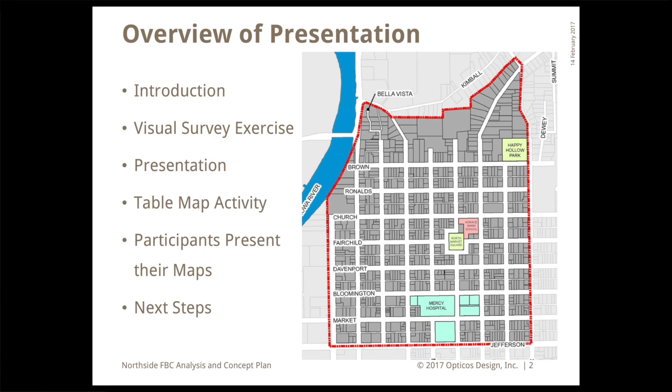So as John said, this is the first of 3 trips. It's really about us starting to understand your community. We had a little bit of knowledge both from Dan's previous trip and from working with staff on a basic framework of a scope. We will be coming back twice more, where we are going to be exploring these topics with you all. So we'll take the input we get today, what we hear from you all, what we'll hear tomorrow night from the South District, what we heard from stakeholders, and we'll bring it back and tell you what we heard.

We'll also tell you what we've started to analyze. So what did we get from looking at these maps? What do we get from looking at the information the city has in their database? So we'll come back and talk to you about that and ask for feedback again. At that trip, we'll start to present some tools that we can use. We'll take that feedback, come back one more time, present again things that we heard, and ask for feedback. The culmination of all of this effort is really a report on recommendations for next steps. So that's where we'll be heading as we move forward in this project.

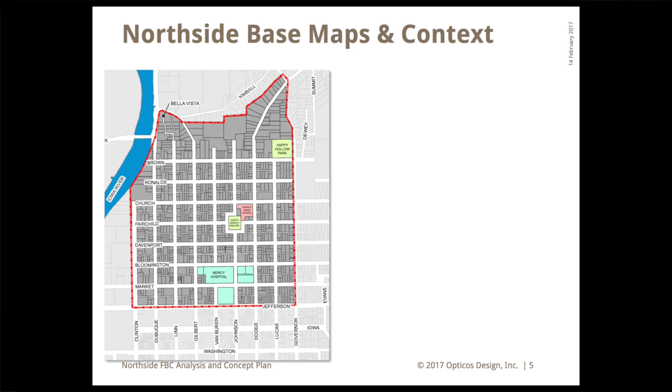For tonight, we're talking specifically about the north side. So from Jefferson at the south up to the parcels just north of Brown Street to the north, Clinton to the west, and Governor to the east. That's where we're focusing tonight's presentation. But as John mentioned, we have another consultant working with us, Rick Chellman. He'll be looking at parking issues, at the north side, but in addition at part of the east side neighborhoods. So he'll be studying that and coming back with some recommendations.

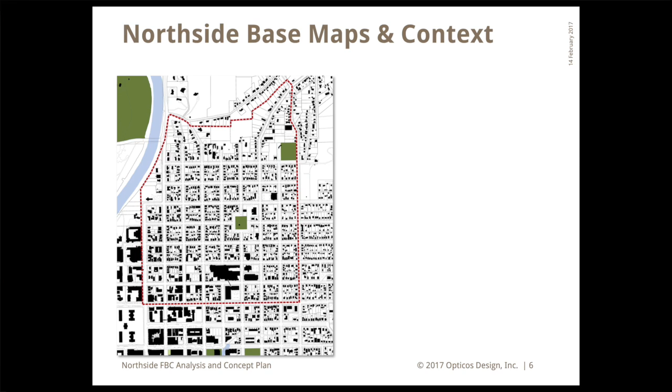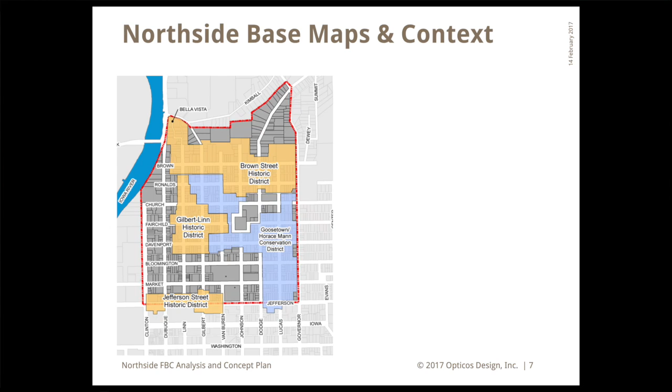One of the things that we recognized really quickly is that you all have an incredible street grid, consistent across your neighborhoods. You have alleys. Some of the alleys are in good shape, some maybe not in the best shape. But you have this wonderful fabric. It's consistent. It ties together all your neighborhoods, even though each neighborhood is distinct. And we understand from these maps that you have identified different places in the north side that have specific qualities. So this is just a summary of the historic districts and the conservation districts you have in place. I'll talk about these a little bit more later in the presentation.

What I'd love everyone to do is spend about 5 minutes, maybe a little bit longer, take the visual survey that's in front of you and just give quick reactions. Do you like the building? Do you not like the building? We've got a little bit of space for you to add some notes about anything in particular that you like or don't like. Points to anyone who can circle all the buildings that are from Iowa City, because some of the buildings are not actually from Iowa City, but they are from the region. We did not bring any photographs from California with us.

And again, this is just quick initial reaction. Our intent is not to use this as a preference that the community only wants this style of architecture or this size building. It's more for us to understand from you all what you see and what you like. And it'll build into what Dan will talk about later with building types. So I'm going to jump ahead with the presentation. If you need a little bit of time, feel free to go ahead and put in the last check marks.

So one of the things that we identified and have heard about is walkable cities. The north side is a very walkable community, and I'll talk a little bit about what that means. But one thing that's happening nationwide and is also evident here in Iowa City is that walkable cities, or parts of cities that are walkable, are really starting to thrive. People are coming back into them.

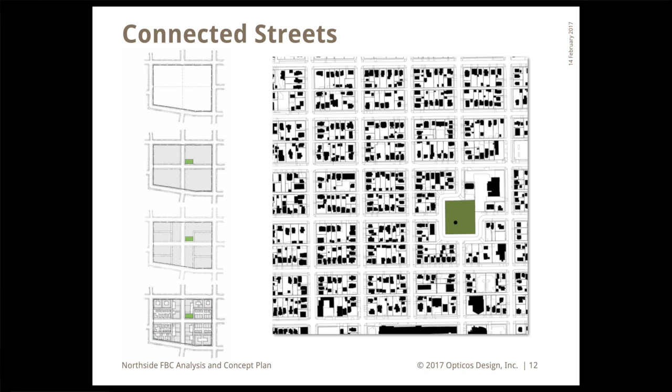You have buildings that have active frontages, that have glass, that have shops. You have tables out on the streets. You have street trees. The north side has an incredibly beautiful tree canopy along so many of the streets. On-street parking, narrower travel lanes, not always the case in all of the north side, but it exists. And there's generally a sense of enclosure.

We recognize that your historic districts have some great regulations that talk about making sure you have active frontage, you have windows, you have doors, you have porches and stoops. But we also recognize that not all of the north side actually benefits from that, because not all of the north side is under a historic district or conservation district.

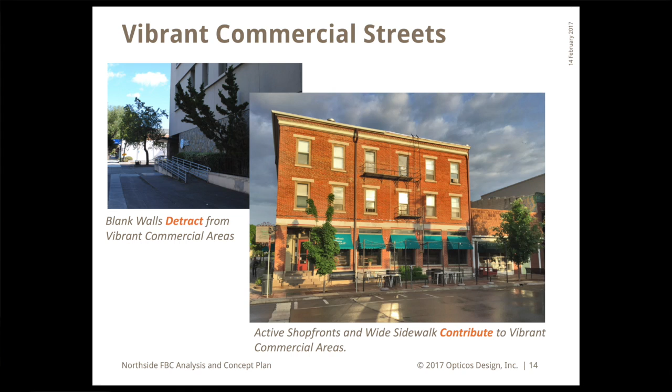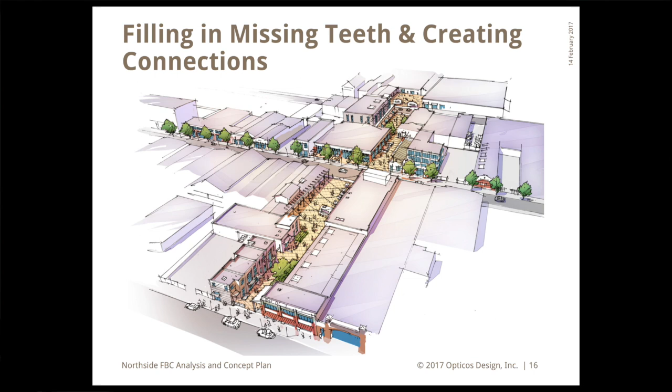So I talked about the commercial streets, but there's also the recognition that livable streets are really about thinking about residential streets as well. What are the characteristics on your streets that make it friendly for you to walk down the sidewalk, to sit out on your porch, as we heard from stakeholders, have some tea, have some coffee, do some work, meet your neighbors. In your community, we saw lots of stoops. We saw a lot of porches along buildings. Those are important elements. The traffic generally runs slower. You have street trees. You have on-street parking.

And so again, we've got a chance today to go out and photograph some buildings. We'll spend some time tomorrow photographing buildings, and hopefully I'll get a chance on Thursday to take some pictures. But again, we are just starting to really understand everything in the north side.

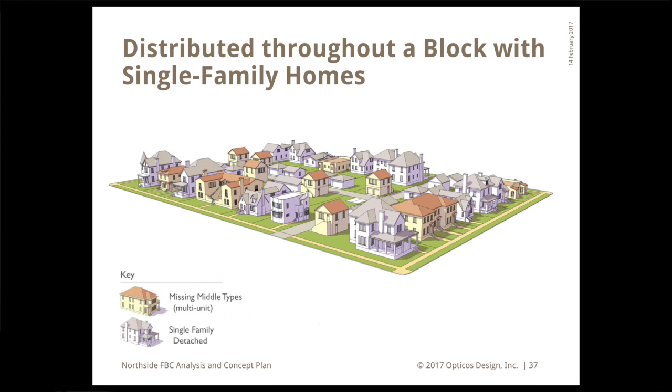The other thing is, we found out the other day that my son's first grade teacher in the same neighborhood lives in a triplex. In the second unit of that triplex lives her mom, who's another first grade teacher at the same school. And in the third unit is her sister and brother-in-law, and her brother-in-law is my daughter's middle school PE teacher.

So part of this is providing affordable options within walking distance, in this instance, to those schools, so they can actually walk in those environments. So there's conditions where historically there was a particular street with a mix of missing middle housing types, and then you turn a corner and it might become primarily single family. And there might be places where you want to reinforce a pattern like that.

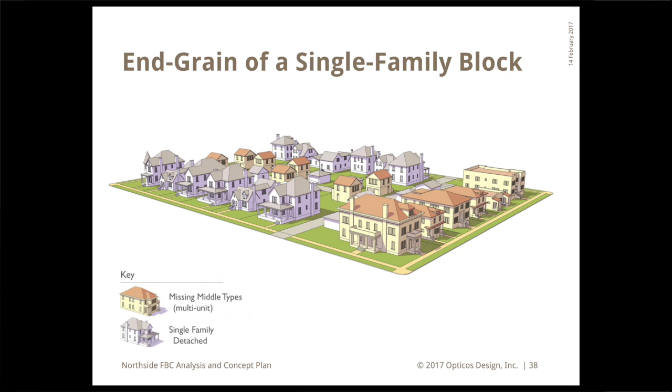And then there might be a pattern where maybe it's the edge of your downtown where you've allowed bigger buildings, 5-6-story buildings. You turn down a corner, and historically we see this a lot: a couple of the lots are a fourplex or a duplex, and they transition in scale, and then it becomes primarily single family. We kind of knew how to do this in the 1900s and we forgot.

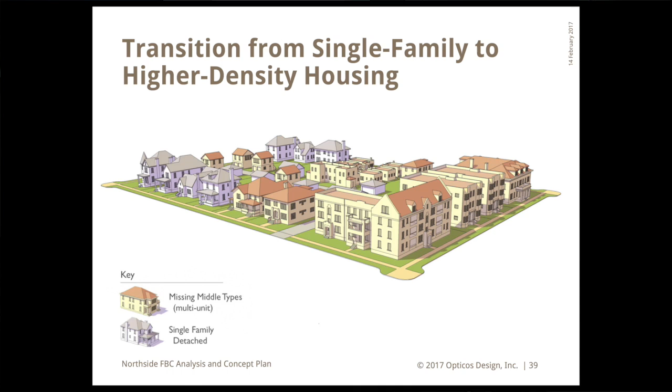And so part of this, especially in thinking about the form-based code or refining your zoning, is thinking about how we might apply these types in appropriate locations for transitions or to provide that range of housing types. Another instance, similar: turn a corner from a main street, a couple of missing middle types serve as a transition into a single family neighborhood. So we could be thinking about that here as well.

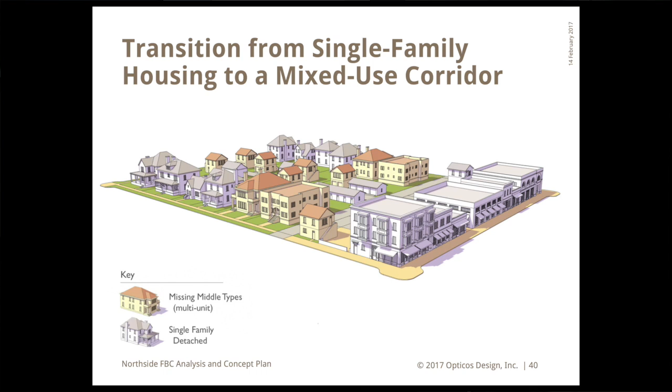So form-based codes. First of all, don't get caught up in this title. Let me just go to this slide. It's simply another way to think about writing effective development regulations. How many of you, if you want to Instagram or tweet or email a photograph to a friend or family member, use a Polaroid camera for that? Nobody.

So the way I like to start this conversation is thinking about use-based zoning, and 99% of cities across the country still have this. They're operating with a 100-year-old operating system. It's an out-of-date operating system for trying to effectively regulate for a historic neighborhood, a neighborhood main street, a transition from a downtown to a neighborhood, because there's the need for a more complex, effective system for addressing the nuances in those existing conditions.

And so I like to say that a form-based code, I'm going to go to the next slide, John, is the new operating system. It's about understanding the conditions in your neighborhood carefully and studying them, understanding the neighborhood's desired vision, whether it be preservation or conservation with a little bit of evolution, or maybe evolution in a little piece where you might fill some lots and preservation in another piece. It's simply about creating a system based primarily on that desired form, and the nuances of effectively regulating for those types of environments.

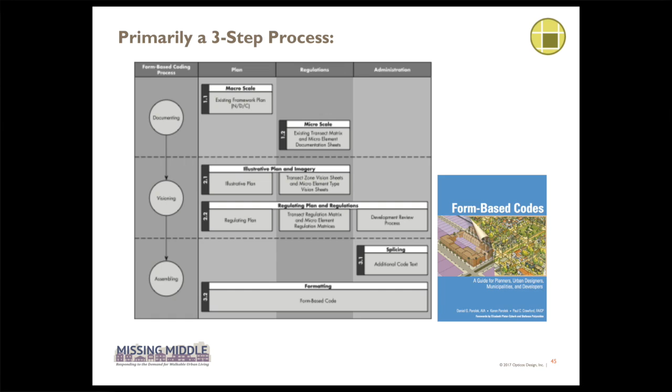Then the second thing is actually a visioning process. We say that you need a vision in place first before you actually try to write the rules for regulating something. And so in this particular process, we are going to stop at this point of making a recommendation for next steps and possible applications. But whenever we do this, and if you just Google form-based code, you'll see that it's usually tied to working very closely with the neighborhood to reinforce a vision you have and maybe make tweaks to that, because I know you guys have spent a lot of time and energy doing that, and then putting the code together to implement that vision effectively.

And one other thing that I want to say is that a lot of times we go into a community and they have an overcomplicated system because, like I said, they were trying to use the Polaroid camera. And so the base zoning district was not creating the right kind of development. And that's exactly why your historic districts popped up, initially at least. And we see that everywhere. And then places like Austin, they didn't stop at the historic overlay. They did urban design overlay. They did 15 other overlays to the point where the system was just, we called it broken. It wasn't working. It wasn't effective, impossible to understand.

So what we like to say is when we're doing a form-based code, as much of that really good intent that you all have spent a lot of time and energy on, we try to compress as much of that intent as we can into a new set of form-based zoning districts. So usually the historic overlay still exists because there's a lot of really detailed architectural elements, materials, windows, and stuff that we wouldn't necessarily put in a zoning code. But a lot of the site standards in terms of the size of the building, the lot placement, orientation to the street, we actually compress that and put that into a new form-based zone district.

So this is going to look very different. I know you've done a form-based code south of downtown, so you're a little bit more familiar than a lot of places. A lot of a form-based code is also about clarity and predictability. The form-based code would look like this: lots of graphics and very simplified, taking paragraph after paragraph of text and putting it into tables and tying that to the graphics.

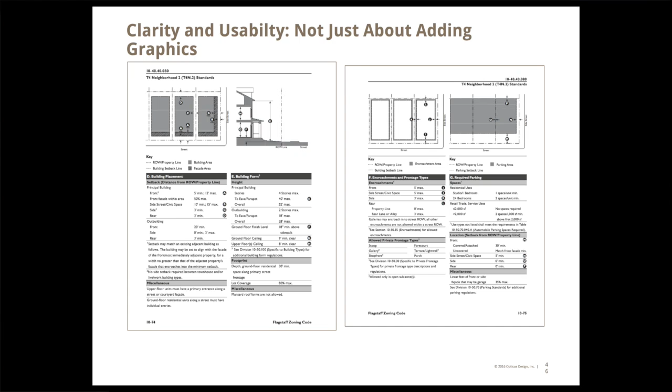The other thing that's important is we're not just picking numbers out of thin air in terms of a density or a FAR, floor area ratio, or setbacks. We actually test case studies on individual lot sizes in your neighborhoods. And I know that there's pretty limited infill opportunities in the north side, but we take what opportunities might be out there and assess those standards on those individual lots and then back into those regulations.

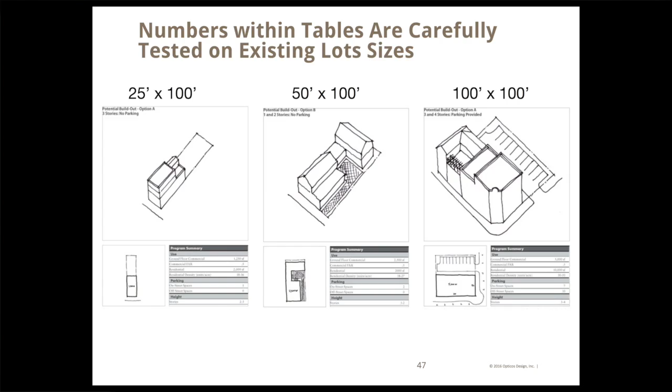This is just an example: in one community we worked in, they had this 50 by 100 foot lot. And this is not architecture, this is just a massing diagram, but this city zoning code actually allowed this as a single family house in a historic neighborhood. And I think to everybody in that city, it was really clear this was not compatible. This is not what they wanted. This is what their zoning allowed. They were pretty shocked to actually see what was allowed.

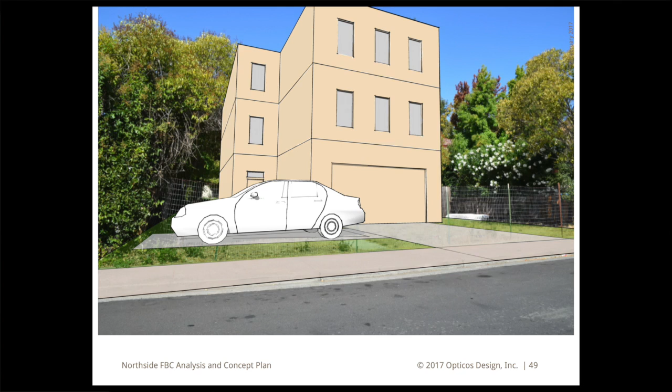And then we take a step back, and the intent isn't just to allow; this was an area that was actually zoned for multiple units on a lot. So the other thing is, if they went through a zoning amendment process and got a couple extra units approved, the developer could develop something that looked like this, and everybody once again agreed that this is not what they want.

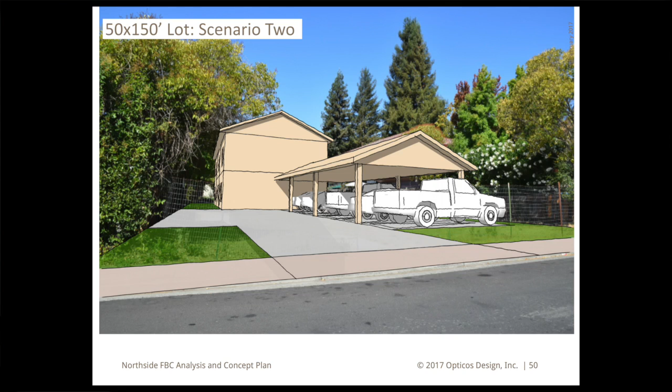But then we said, well, let's think about a fourplex, a missing middle fourplex, right? This would actually, in this context, give the builder one more unit than that previous example, but it gives the neighborhood what it wants in terms of a building that's reinforcing the streets, vibrant streetscape, the scale. And maybe the trade-off is the bar is raised a little bit on the architecture quality because it's in a historic neighborhood or something of that sort.

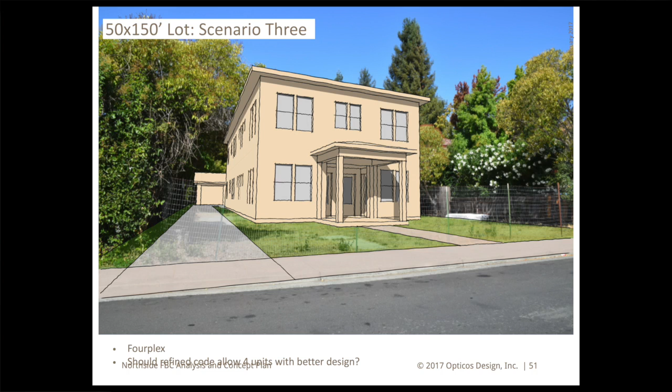Now, what I'll say is that you don't have to be worried. Form-based coding still has use tables. I think one of the misconceptions out there is because form-based code is regulating form primarily, that it doesn't regulate use. But we still do regulate use. It's just secondary as opposed to the primary intent. So in a neighborhood, we wouldn't allow commercial uses in a residential neighborhood. Just being very specific where we want those uses as well.

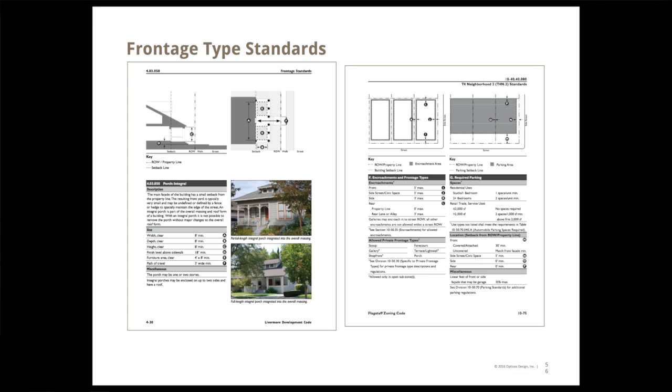A couple of last things: I wanted to introduce the idea of frontage type. And this is how a building interacts and interfaces with the sidewalk or the street. And it's actually really, really important, and most zoning codes ignore this, right? Because most zoning codes, without a historic preservation overlay, can't see the difference between this building or this building because it's the same height, the same setback, and the same density.

So it really does matter that not only do you have a door on the street. We saw a lot of projects today that had a door on the street, but didn't really meet the intent of having a door and windows on the street. And you can do that through a historic preservation overlay, or you could do it directly in a form-based code by regulating a set of what we call frontage types. So just something to think about, right?

Yes? That is also a very hazardous type of area because there's shadows at night. And public safety. Built-in trip hazard. Yep. And there's crime. Absolutely. Public safety is something that needs to be thought about in this process as well.

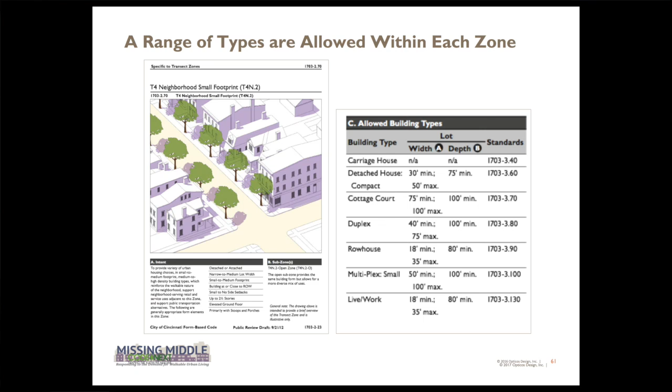And so we're going to talk a lot about building types, as I did with the missing middle housing types as the core ingredients. But each of the new form-based districts in a code that we write, this is from Cincinnati again, allows a range of housing types. So you can see these are mostly missing middle types: duplex, row house, multiplex, small live-work unit. You think of the building types as the ingredients of a neighborhood. Every neighborhood has a mix of different housing types within a certain range. And that's the way we like to think about and regulate those environments.

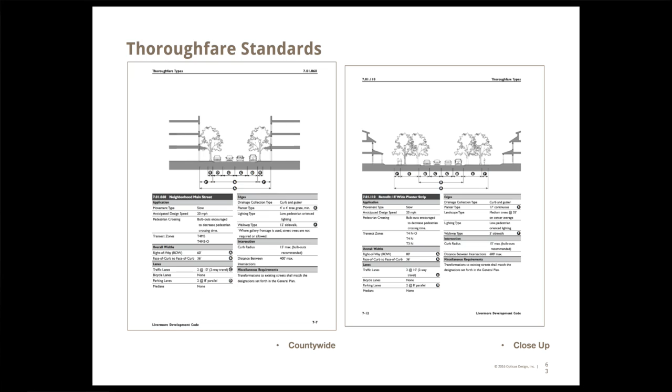So as John mentioned, we do have Rick Chellman on our team. It's a little less applicable here to the north side compared to our work in the south side, but in some ways you're really fortunate because you have the street network in place, you have the natural traffic calming in the brick roads and the ups and downs in your brick streets, but we do think very closely about how the design of the streets impacts and benefits the walkability of a neighborhood as we go through a process like this.